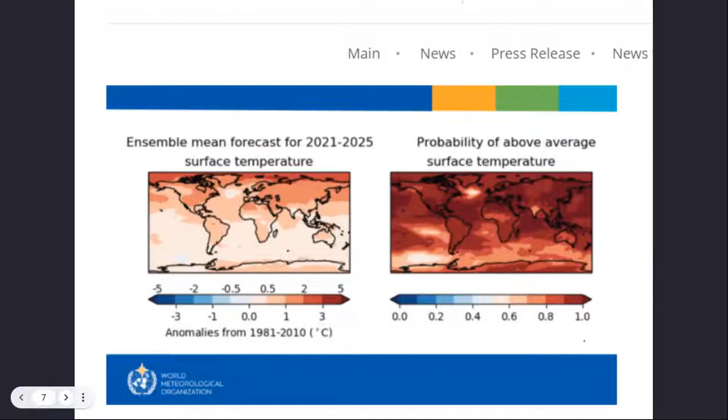I have two young sons, and the thought of them facing the end of the world in the near future is terrifying. Hence, the only way forward is that we become more optimized and more efficient to clear our carbon debt and build a sustainable future for next generations.

Well said, Varun. I think parents like you are eventually going to save the world. I'm glad you spoke about reducing our carbon footprint.

So can a more optimized and efficient workflow in AEC bring a significant contribution to curbing climate change?

Absolutely. One such key initiative is the Golden Thread Initiative. Since its conception in December 2020, many organizations have joined to help pilot ways that organizations can produce a standardized digital golden thread for both existing buildings and new builds.

In order to retrofit to reduce carbon emissions, we need to quantify the energy requirements in the existing state of buildings and the improvements possible. To deal with this, we need digital data. Under COP26 and Golden Thread, the UK needs to retrofit 26 million homes by 2050.

Interesting. I would like to pull in our audience here and ask them: is anyone dealing with such aggressive carbon reduction targets? How are you handling it presently? Please type in the chat box.

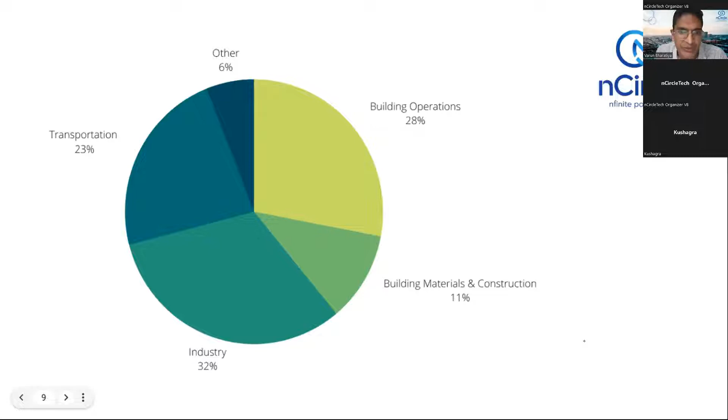Yes, let me break it down for you to truly understand the scale and enormity of this. Can you guess the total number of houses to be refurbished for energy efficiency per day? The calculation turns out to be about 2,600 houses per day.

Do we have digital models for these houses? No. Hence, there is a need to innovate and a need to speed up the process to achieve our goals. We need a lot of data to estimate all of this. We need 3D models to make this happen faster.

So is that where Automation 2.0 comes in?

Simply put, automation 2.0 is increasingly optimizing every workflow. We are moving from reactive to predictive and proactive approaches. Considering the evolution of new computing technologies and artificial intelligence, automation 2.0 is not just a buzzword. Instead, we are in a phase wherein computers now can learn from experience and from the data, and can often do better prediction of patterns compared to humans.

So is that where scan to BIM comes into the picture? Scan to BIM is a term often used these days in the BIM industry. It has emphatically influenced the AEC industry by speeding up digital modeling processes by providing as-built models for retrofit in a very cost-effective manner.

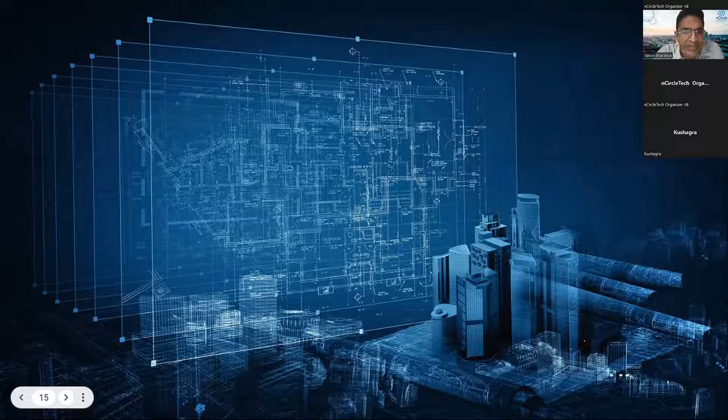However, the current typical workflow for scan to BIM involves the laborious task of taking registered point cloud data and turning it into BIM models, one entity at a time. This creates a big barrier for adoption of scan to BIM. Hence, automation 2.0. With automation 2.0, we can leverage the power of AI and ML and make scan to BIM smarter and faster.

That makes sense. So my next question to you, Varun, is how does scan to BIM help reduce the carbon footprint? Scan to BIM helps reduce carbon footprint in multiple ways. First, the speed of conversion is significantly improved. This enables us to operate with the same team and do more in less time.

The second important benefit is exponentially higher accuracy of quantification. When we adopt traditional approaches, engineers often make certain assumptions - if the total square feet area is so much, probably the heat loss would be around this much, and so on. But with accurate BIM models, each of these calculations is far more accurate, and BOQ calculations are accurate to the point. Last, the digital copy created as part of this process is also useful in initiatives like Golden Thread and becomes a long-term archive of digital data.

That sounds really exciting. Can you dig deeper and explain how artificial intelligence and machine learning does this? Yes, sure. Let me actually show you a demo of what we have accomplished in this process. I hope you can see my screen. Absolutely, Varun.

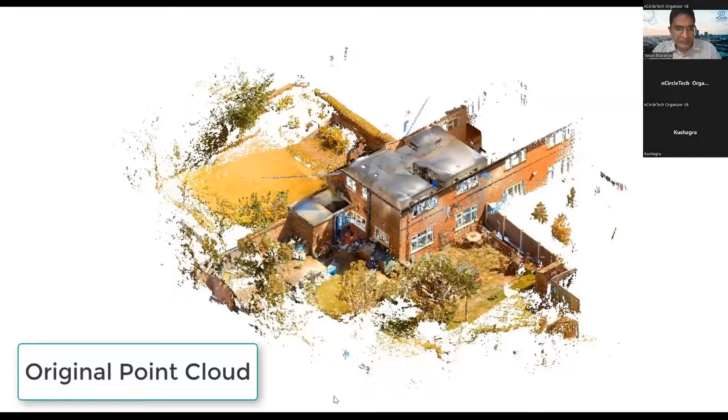So what we have is the point cloud data as I was showing on the screen. All we ask as an input from the user within the Revit environment is to provide an E57 file as input. What then happens is this point cloud is sent to the server. It processes it, analyzes the point cloud data, and comes back with a JSON file, which is then used to create BIM entities within Revit.

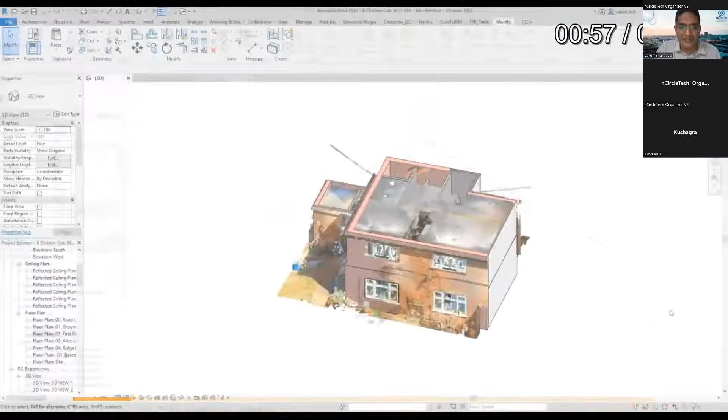Now, the hope is to create that magic button which really converts anything and everything automatically into a BIM model. But let me show you what we have accomplished. This is the output that is generated all automatically from the point cloud data without any user input. Beyond this, the user is just trying to validate and verify if everything created by the automation of machine learning is accurate enough to proceed with the next stages.

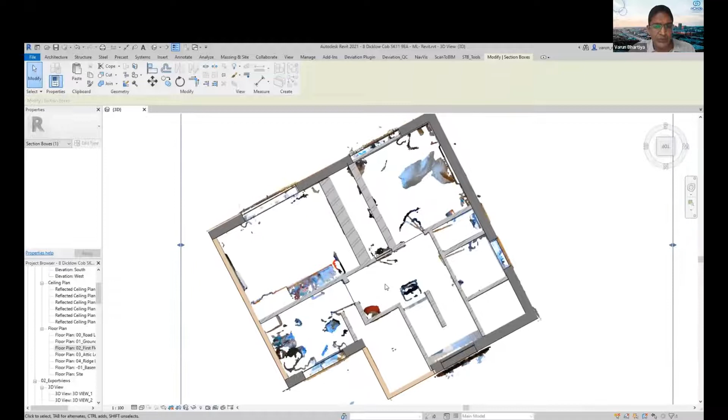Let's take sections on the first floor. As you would notice, walls with different thickness, doors, windows - a lot of that data is accurately placed.

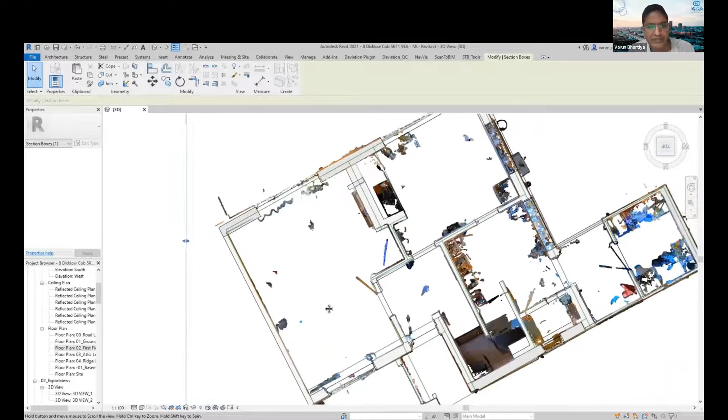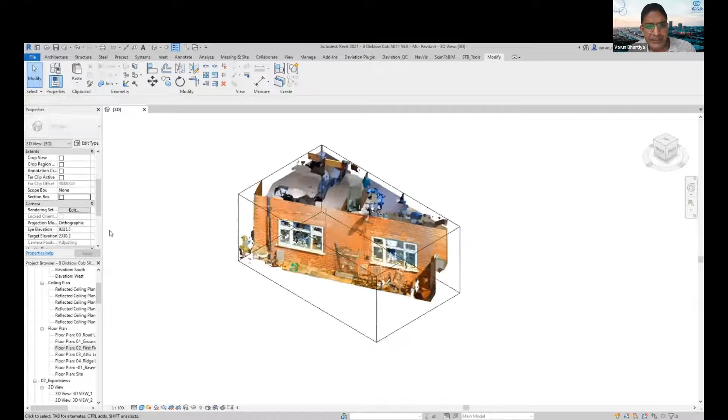We can check similarly on the ground floor as well. You can see a lot of model lines getting created. These are all approximations that the system creates automatically to generate accurate walls in the right places. We're not only creating the walls, but also doors and windows, all accurately, because these are very important for the heat loss calculations.

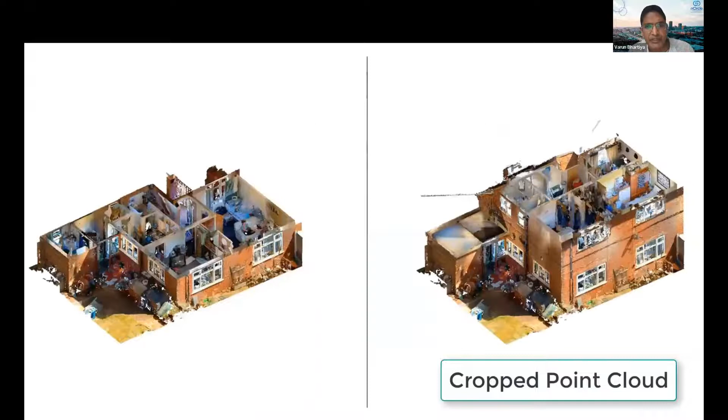Let me show you exactly what is happening in the background of how we are turning this point cloud data into an accurate BIM model. So this is the original point cloud data. This point cloud data is also cropped automatically based on the density of points available in the scan, so we zero in on the exact building that is of interest. Now here's where the core magic of machine learning happens.

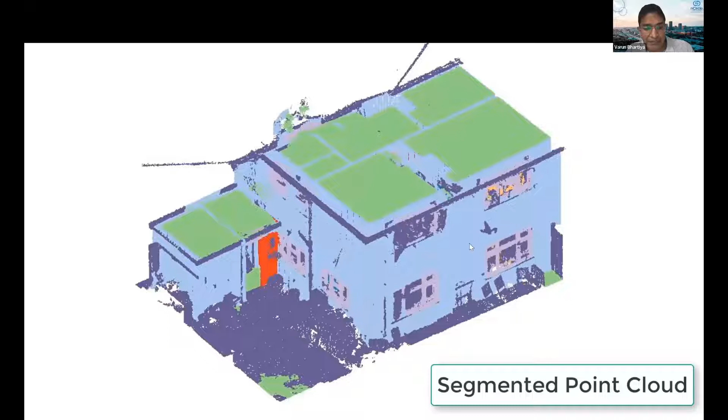The intelligence that it adds to the system is identifying that this group of points are wall points. Think about it - without machine learning, the original point cloud just has color and XYZ values. But with machine learning, we are grouping these points together to determine that this group of points are actually wall points, and these group of points are door points. You can see a door around here and the windows created around here. This is very powerful and helps us do a lot of things.

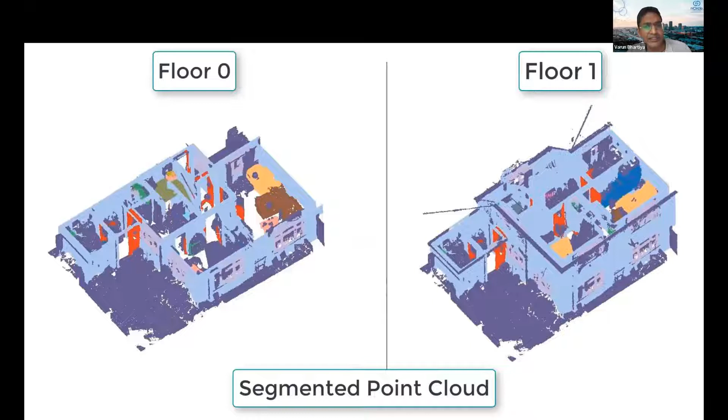Some more sections of the same data - you can see furniture also classified separately, to understand what group of points represent what kind of entity.

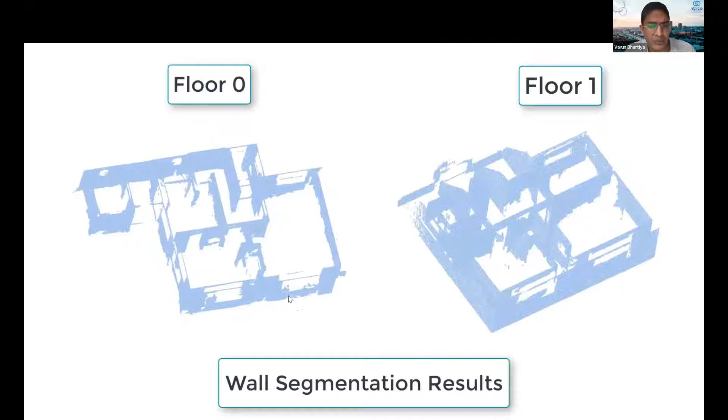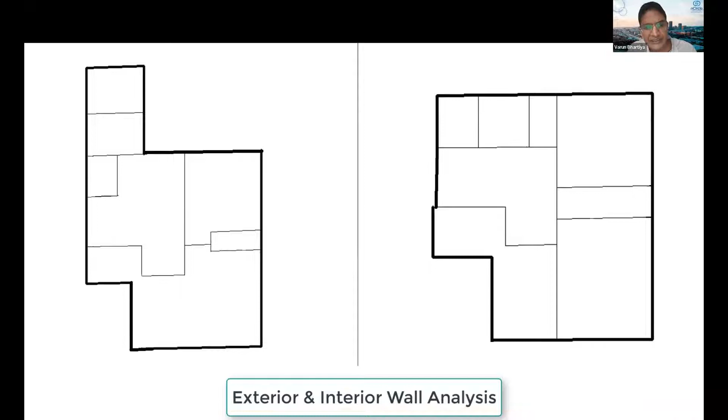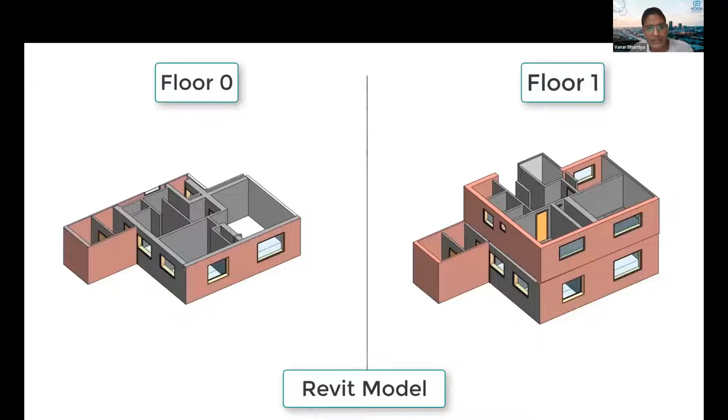Because the data is classified, we are able to extract only the wall points, which are then fed to all our statistical approaches to create accurate walls. We take these wall points, then we do all the plane fitting to create the exact planes identified, which are then combined together to represent the wall. We find interior walls, exterior walls. All of this data gets transformed into a JSON file, which is readily consumed in Revit to create a final BIM model. So here's the first cut BIM model, all created automatically with the help of machine learning.

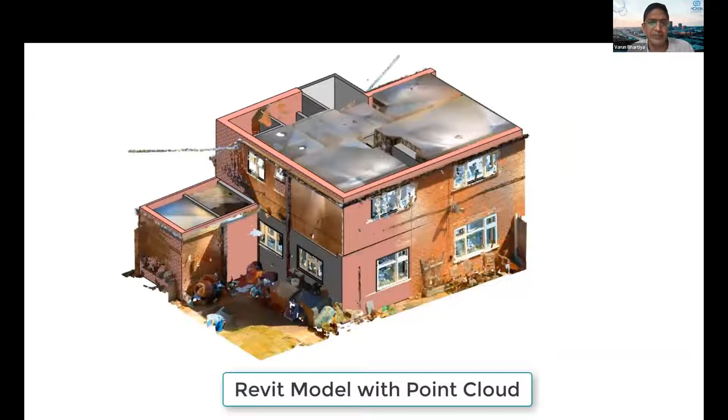Now, our larger goal is to speed up the entire process of scan to BIM. So we've not just stopped at automating the BIM model creation. We've also tried to speed up our process of QC checks.

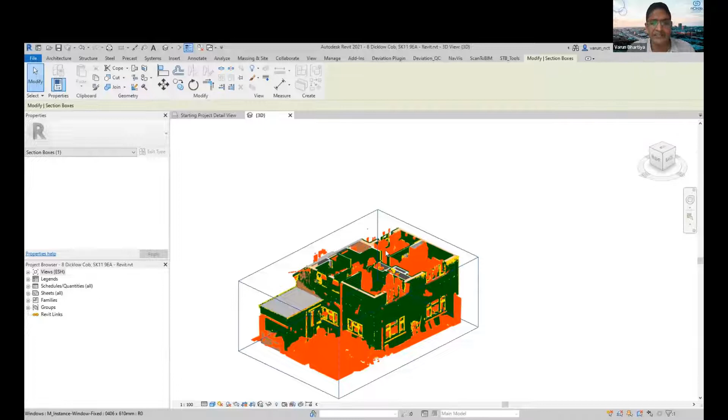Before this approach, the traditional approach is modelers create sections at every 1 feet and then try to look through the entire data to understand what is deviated or what is not modeled, and it is so error prone. We faced so many issues when that was happening.

This system, this plugin, creates a very good heat map of everything that has been modeled and everything that has been deviated from the given modeled entities.

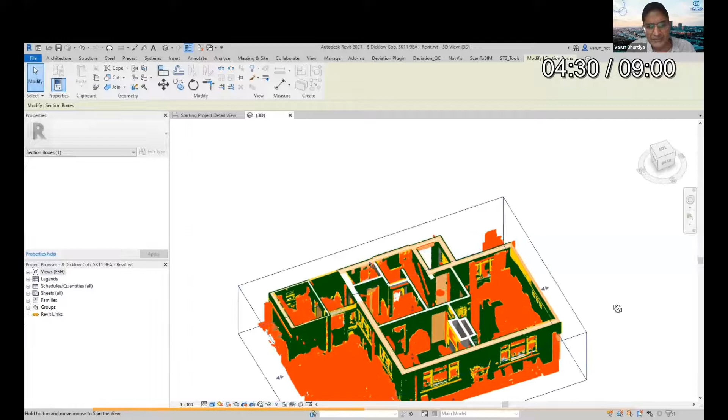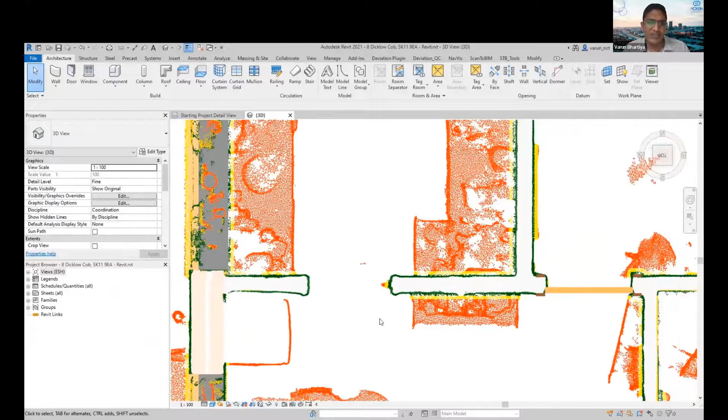Let me show you this in sections. As you would notice, anything that is very close to the corresponding entity in Revit is marked in green. That is 0 to 20 millimeter deviation. Between 20 to 50, points are marked as yellow, and 50 to 100, anything above 50, is marked as red. This helps us spot any kind of deviations and issues very, very quickly, thus making our process of final quality of deliverable very, very accurate as required.

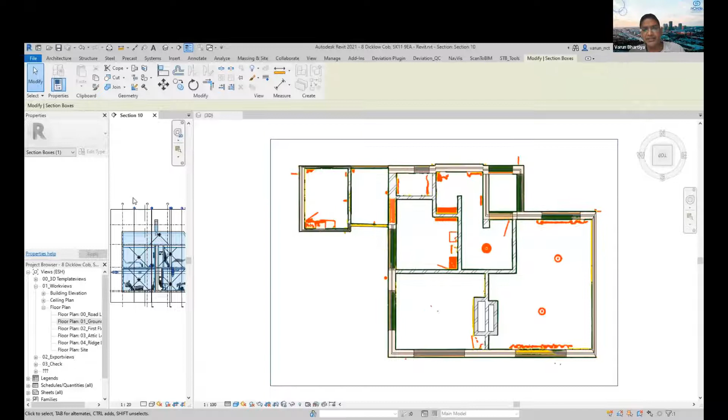This just speeds up the process of QC as we go along through top to bottom. Everything, every change in the model, everything that is missed is very clearly identified. As you will notice, a lot of furniture which is not really impacting the heat loss calculations is not modeled, but it's definitely speeding up the process and bringing accuracy in the model.

Now, again, as I said, we've not stopped at creating the BIM model and doing the accuracy check. The very important thing is how do we do heat loss calculations? So heat loss calculations require a lot of quantification output. You need to understand all the wall surface area, what are the different rooms above and below, what is my floor area, and everything.

So we generate tons and tons of data in a single click, which is useful to understand exactly all the wall surface that can be insulated to keep the heat inside. We also find a lot of adjacencies between the rooms, because you may have some rooms which are heated and some rooms which may not have any kind of heating, and this also impacts a lot of heat loss calculation. So all of this plays a big role in calculating the heat loss and thus coming up with an accurate tech survey, which then feeds into the next set of processes.

Highlighting this overall, right from taking the point cloud data to creating the BIM model, to accuracy check, to generating all the calculation output, the entire process is speeding up every step of the way to ensure that we deliver speed and convert as many point cloud data to BIM models as faster.